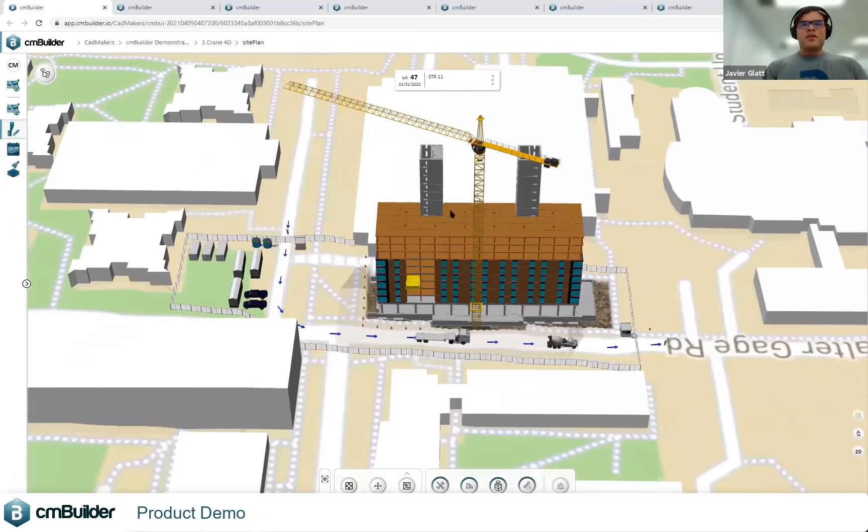And with that, I will lead into our little demo here of our product, cmBuilder. Pedro is going to share his screen, and we'll work through here, because a lot of what we're trying to solve with this project is exactly this. There's this idea of removing the barriers, getting people to be able to access using web-based technologies, digital technologies, mobile technologies. And we'll get started. So I have Pedro, who's on the other side of the table, physically distant from me, helping me. So I'm going to talk and he's going to click. And I will ask for some of Brent's assistance here. This project looks a little familiar to you. Hey, Brent. Absolutely, yeah. Great.

So what is cmBuilder.io? The idea is it's a fully web-based, 100% web-based. So there's no app. It just runs in the browser. It's a 5D, so 3D being the model and geometry, 4D being the schedule, 5D being the cost, site logistics, planning, and simulation product. So the idea is to actually use data and intelligence, not say digital paper or 2D with Excel, to just easily lay out your construction site, simulate how you're going to build it, find risks, optimize, and then share easily with your stakeholders. Now, our goal of this product is to democratize digital construction.

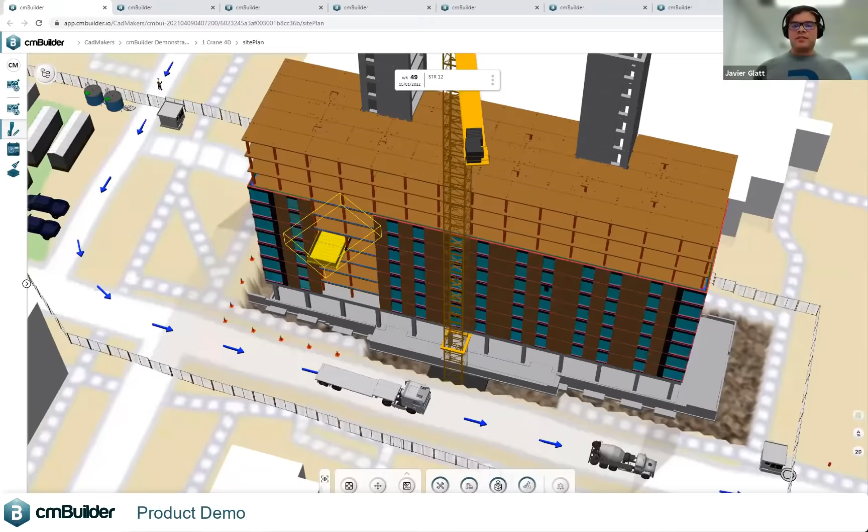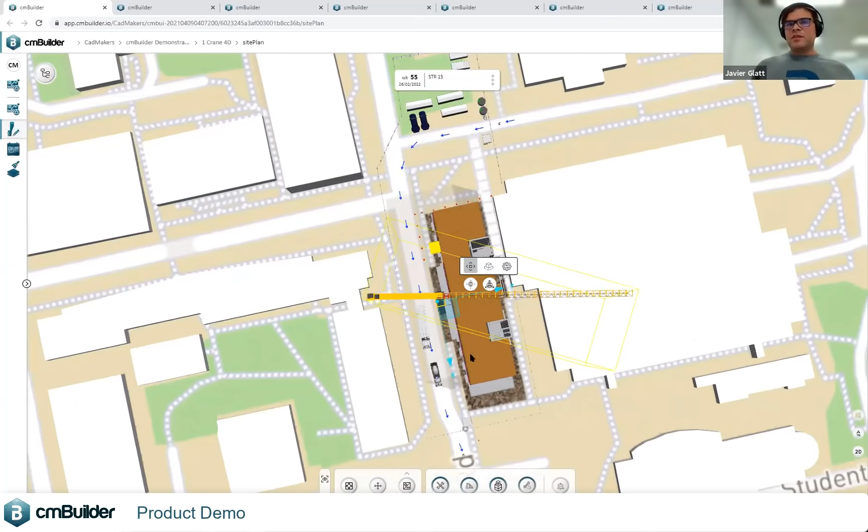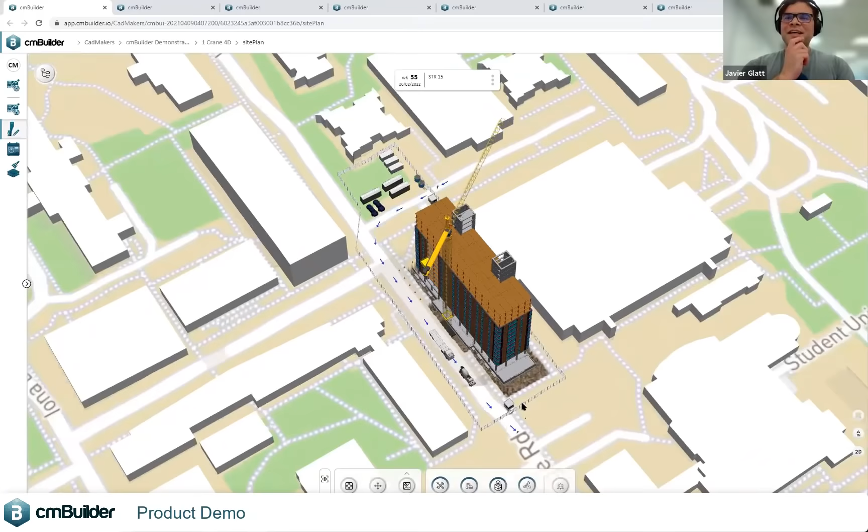We want to bring a high value, low effort, low cost solution to the marketplace that allows rapid simulation, different scenarios, what's 2 crane versus 3 crane. Yet all the resources coming out of cmBuilder are fully parametric if it makes sense to be. So we'll show you the cranes are fully parametric, the hoist, etc. We'll show you in a live demo. Now, some things don't need to necessarily be parametric depending on the resource, like cones. It is still laid out parametrically based on rules, but the parametric aspect, it depends. So why are we building this?

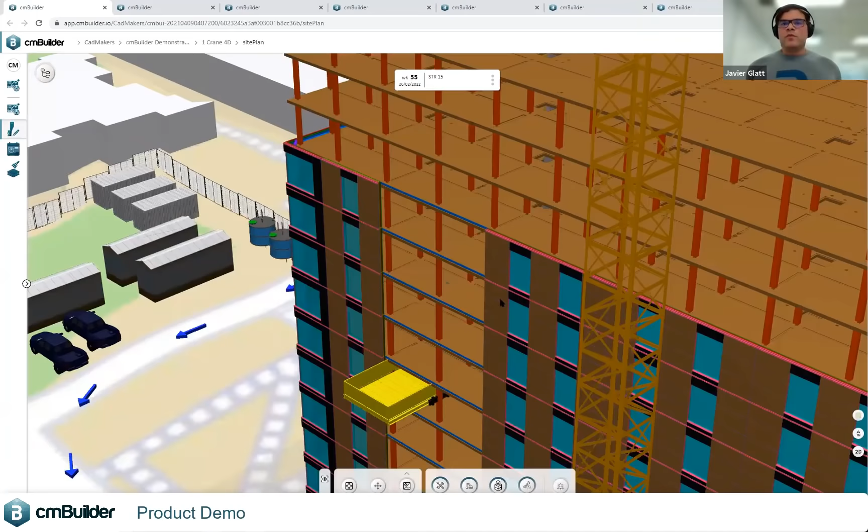And last thing, open BIM. So the idea is, we built our own converters from IFC 2x3, IFC4, STEP, and FBX. Work in Revit, SketchUp, Tekla, CATIA, it doesn't matter. The idea is that you upload the model in here, and if you don't have a model, you can also create massing inside the product directly in the browser. It's very easy to do. We'll show you that. Why do we build this?

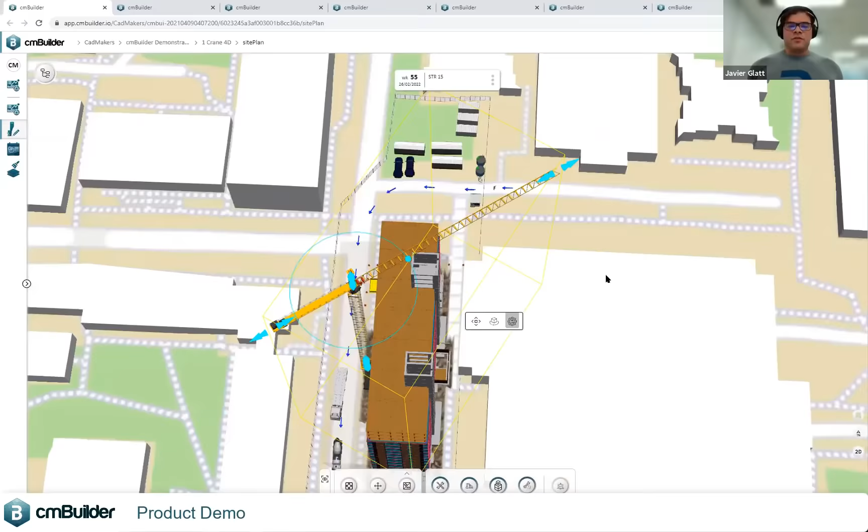So a lot of the themes we talked about today, right? This is just us providing solutions into the market, listening to people tell us their problems. And pretty much 95% of the addressable market we deal with do their site logistics plans using what I would call a digital paper workflow, right? Basically a 2D PDF editor with some Excel. And this is the analog kind of process we're talking about. Once you flatten that and email it, it's gone, right? There's no data, there's no intelligence. It's really hard to learn. It's really hard to scale from job to job. Richard mentioned how you're making similar mistakes over and over again. It's really hard to have that in a database.

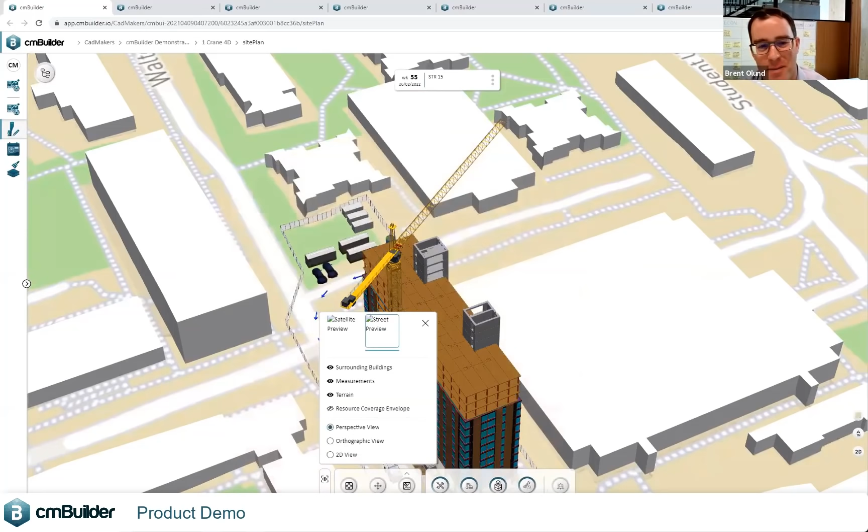Javier, I just want you to stop the screen there where it says week 55 on the top of the drawing, and just to point out that the way we used to do this was literally tabloid size flip charts of paper, and you had to actually draw the stuff on there.

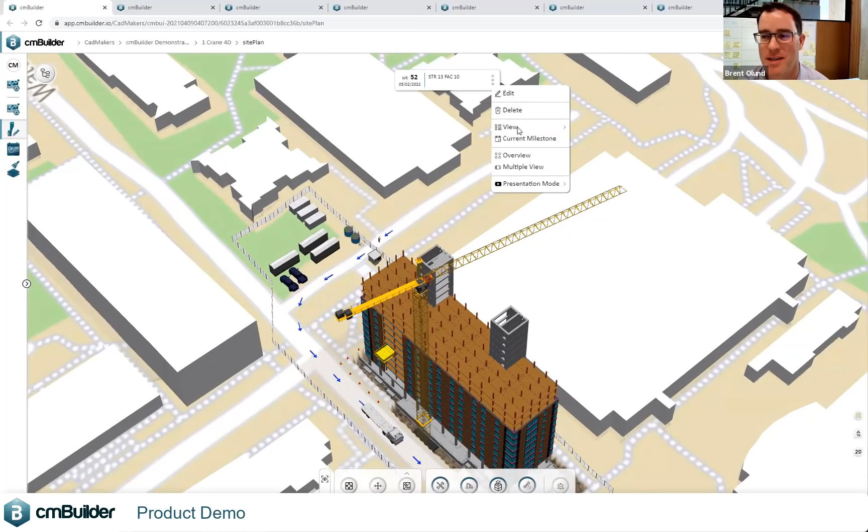And heaven forbid you didn't draw things right on one of them, you had to start over. And we did jobs that were 10 to 24 months, where each month end was a flip chart of how the logistics were going to be. Now, mostly multi-building sites, but this one here, one building, it certainly still helps to have the time scale shown as to what's happening and really can walk people through how the site's set up a certain way.

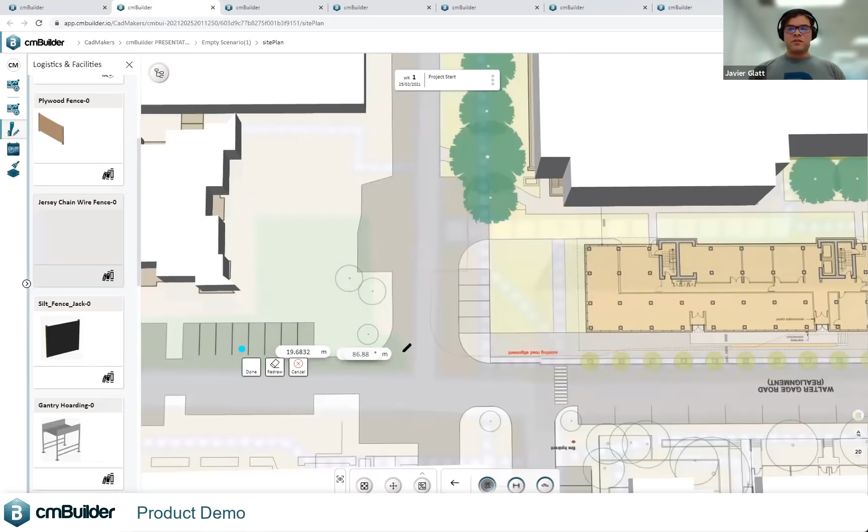Yeah, for sure. So basically, at the bottom of the market it's kind of like 2D PDF editors, Excel. Top end of the market, you have maybe higher value solutions, but they're sophisticated. They require locally installed software. You need to be trained, expensive machines. So it leads to a lack of scaling in terms of industry. So by us starting from scratch, literally from scratch, and building it with customers on the front lines, the idea is to truly transform the digital workflow of pre-construction planning and superintendents moving forward.

So what we're going to do is we're going to start live here. So this is a construction site. We've snapped in a drawing. We've overlaid that onto our site. When you start in cmBuilder, you put the address in. It creates a map tile. You can choose with topography or without topography. This is a flattened view. And then you have a whole suite of tools to start planning your construction site.

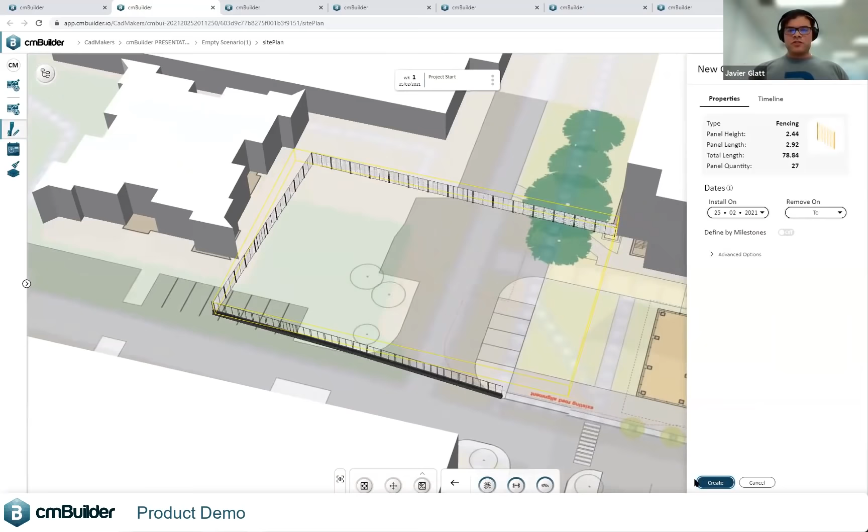So what Pedro is doing right now is he's saying, okay, let's use Jersey barriers on the roadside, and then just a traditional chain link fence. As you can see, every time you place a resource, this is parametric modeling happening directly in the web. So you're just clicking directly in your browser and generating new geometry, new information, and laying out your construction site. I'm sure, Brent, it's stretchable. That's the way I like to describe parametric. It means you can stretch it, but you can also add rules to it that say, if you stretch it beyond a certain amount, it adds another post inside of it or things like that. Correct, exactly. It's rule-based.

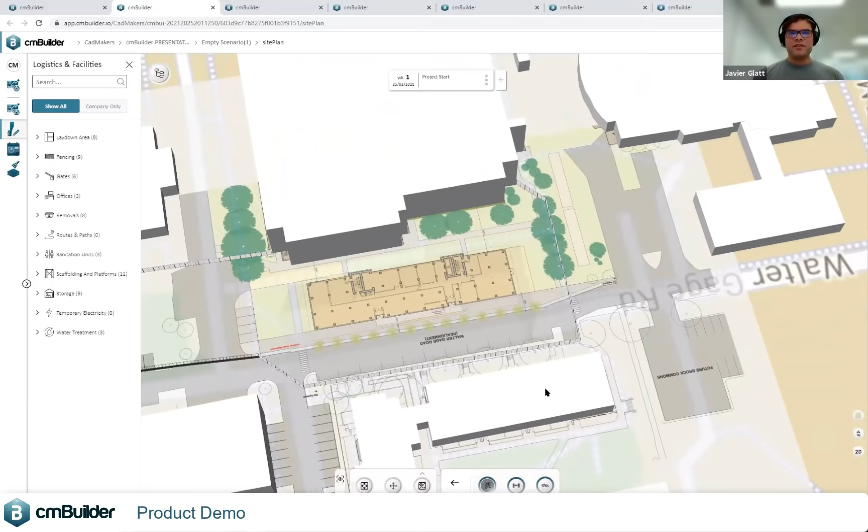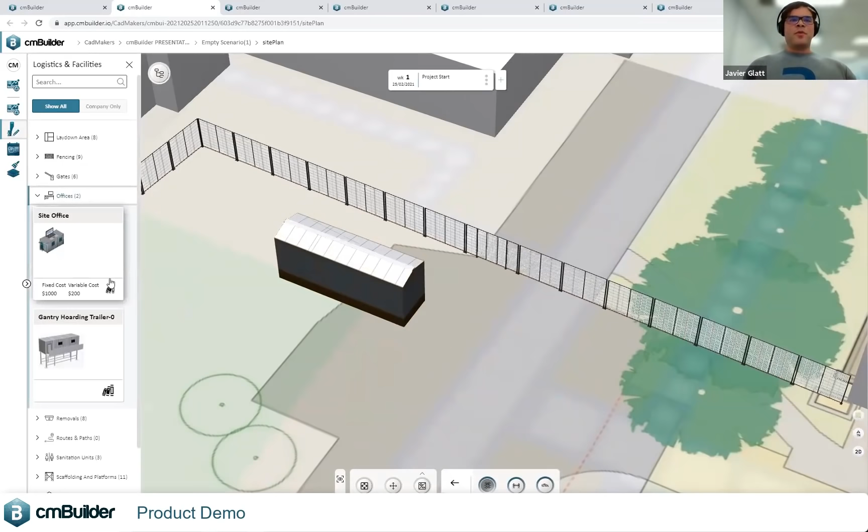So now we're starting to do fencing. Now let's start doing accommodations. So again, we haven't done anything with a model yet. We just have a drawing that every job has. Often in early stage logistics, you might only have a drawing. Snap that in, and you go into a catalog of parametric resources. Let's lay out our trailers here. So if you have a parametric trailer, you can start planning, okay, if I'm going to have over 50 people on site at any given time, we need to have 4 porta potties. We have to have the appropriate amount of accommodation area for your trades, your sub trades, and laying it all out.

I know the actual project, Brent, you didn't have that much space, so good job, Pedro, by cooking the books. Eventually, cooking the books.

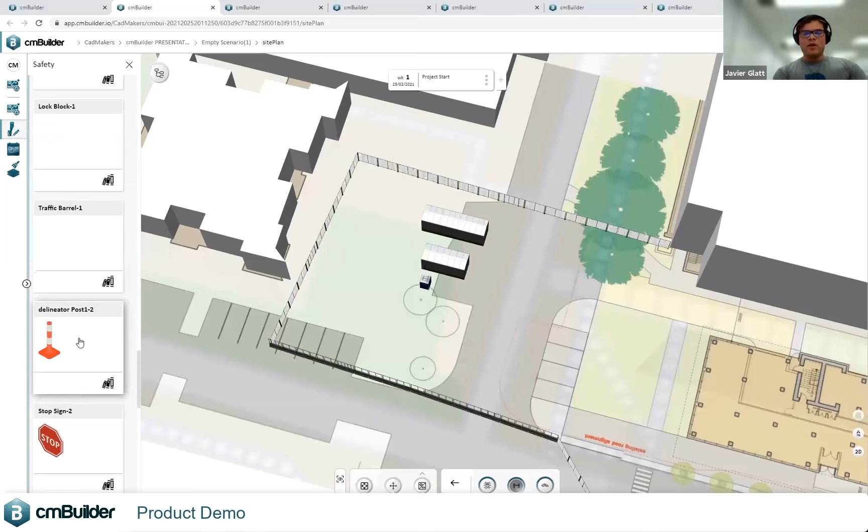Yeah. So we're not going to do every single thing here, but you get the idea. Let's go to traffic control. Huge on just about every site, especially those downtown sites where you have really tight sites, postage stamp sites. So let's start thinking about logistics around traffic. So cones, are you going to have to shut down one lane of the road during construction time? Do you need flaggers? How many flaggers are there?

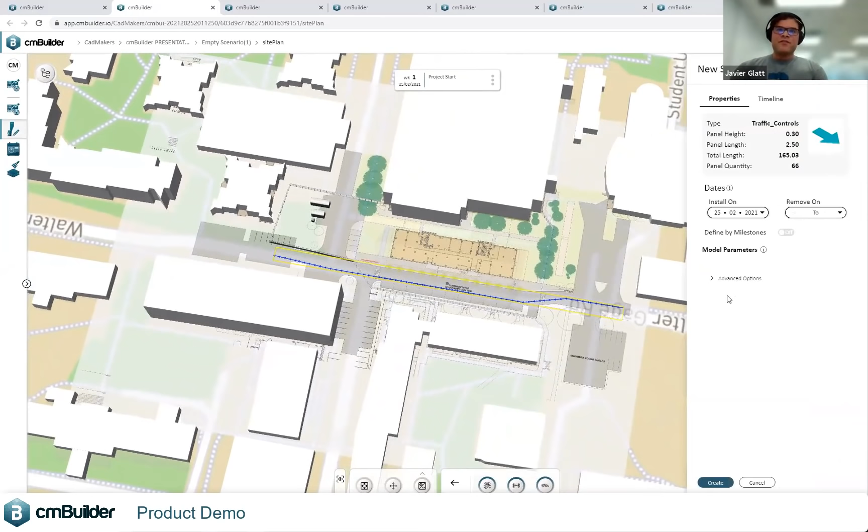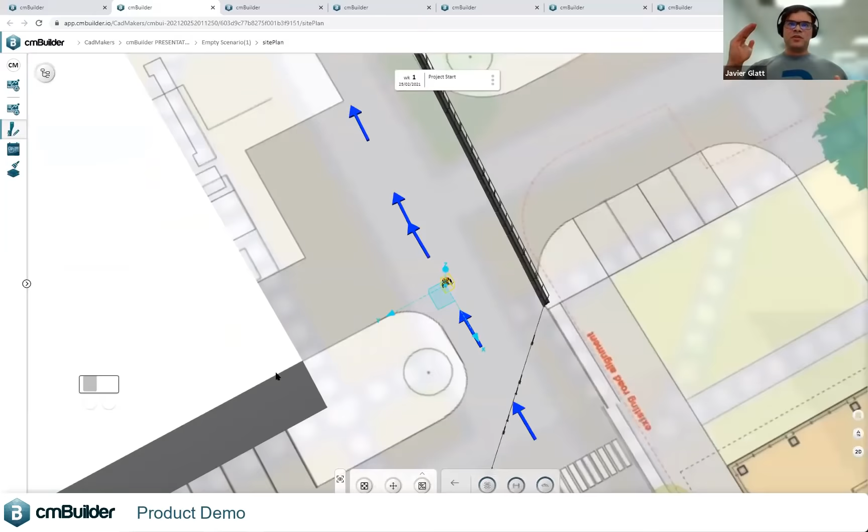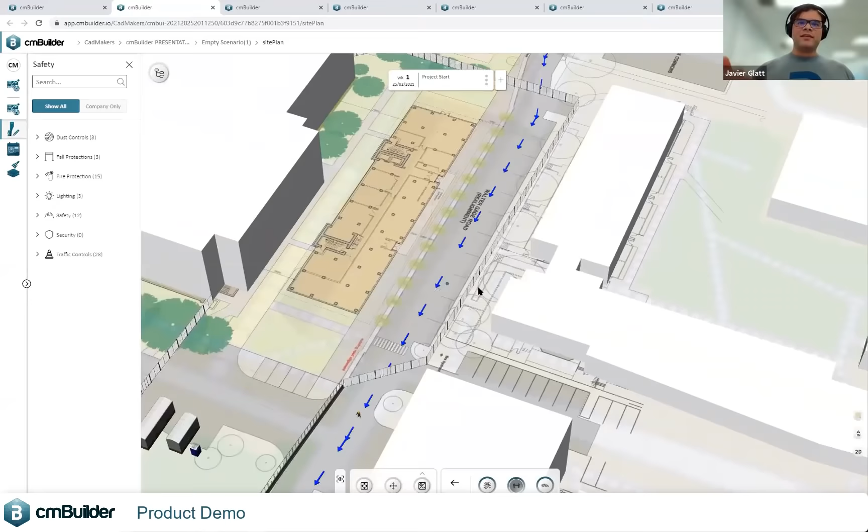And one thing we didn't do that I was supposed to do, which we'll show you in a second, is every single thing that you're placing here into the scene is automatically syncing. We won't show it now, Pedro, let's just keep going, but it's placing into a master format cost histogram of your general conditions. So this is only the GCs required for operating the construction site. So if you have an 18-month build and you need a crane from month 3 to month 17, you're capturing all the costs automatically as you're adding things to the scene. So if that flagger has an X dollars per hour rate, all that data flows into your site and logistics.

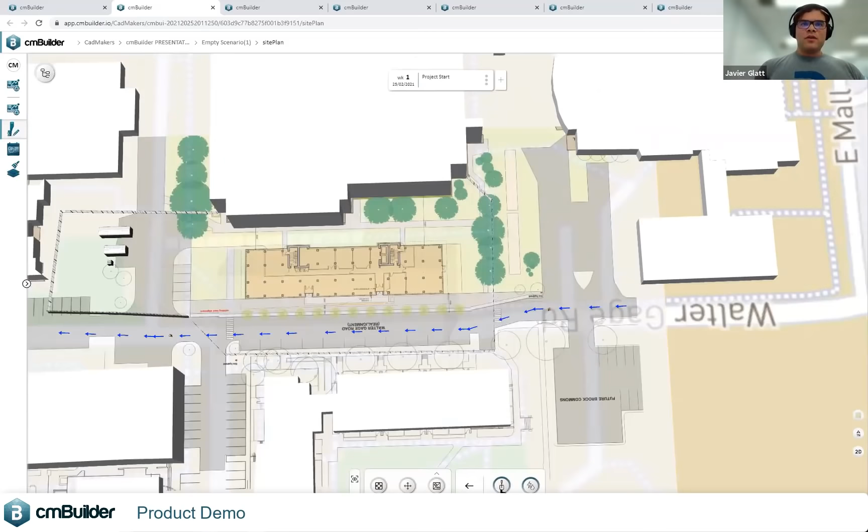Okay, so now we've started thinking about, you get the idea. There's a whole swath of site logistics planning out of the box. Let's start thinking about excavation, Pedro. So let's get on top of the model. You can go in 2D or 3D mode and start planning the excavation. For now, we have kind of this drawing here that helps guide you. If you have grid lines you want to reference inside cmBuilder, it makes it a little easier. But Brent, I'll ask you the question. You remember this job?

I know we spent quite a bit of time in the ground coordinating. How deep roughly was this excavation? It was a pretty shallow one, was it a few meters only, right? There wasn't really a basement, but we had some deep core footings, deep tower crane base, and underground water storage tank. We had to coordinate those things with all of the underslab plumbing.

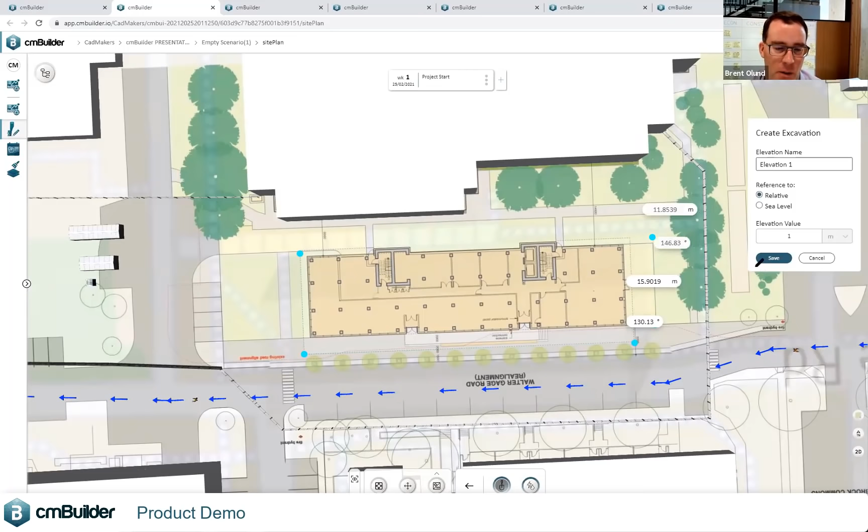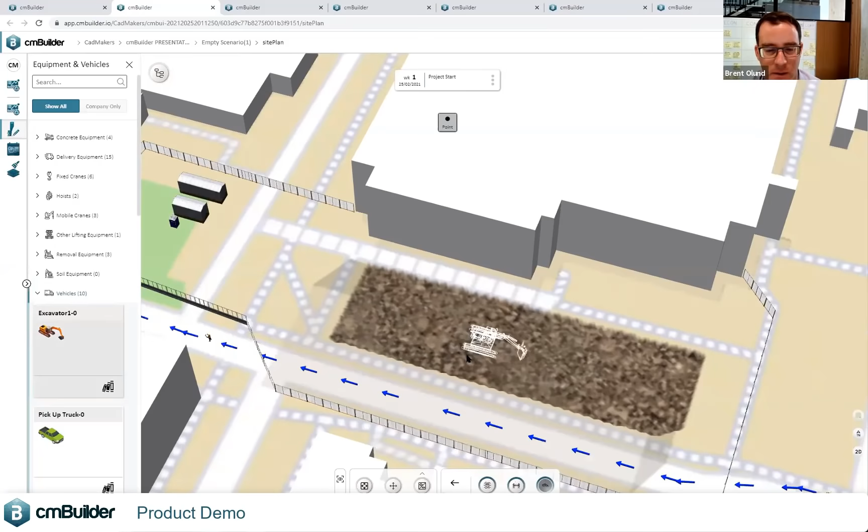And one of the things I liked about working with you guys and the model was we could kind of imagine that we're in the ground looking up at the underside of the model as it pertained to all the footings and the coordination, and ask some of the right questions then about how to solve some of the problems with getting the plumbing from point A to B through all the footings without losing slope to drain. There you go. Okay, fantastic. So this is a very shallow excavation.

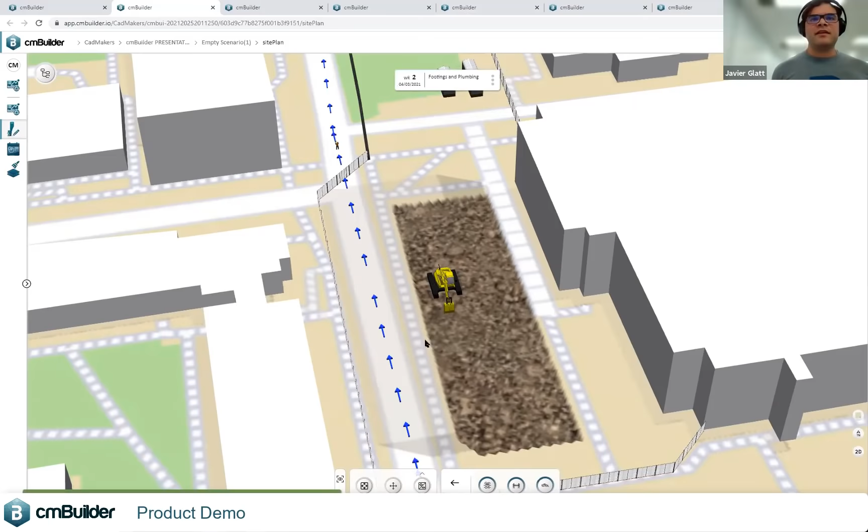What Pedro's going to start doing now is visualizing the construction site during this milestone. So at the top here, as he's going, he's basically creating his 4D schedule and his milestone, saying, okay, I need to start excavating on this date. We're starting from the east side to the west, or however you want to do it. Now, we'll talk about at the end. We have a whole huge system coming for excavation planning.

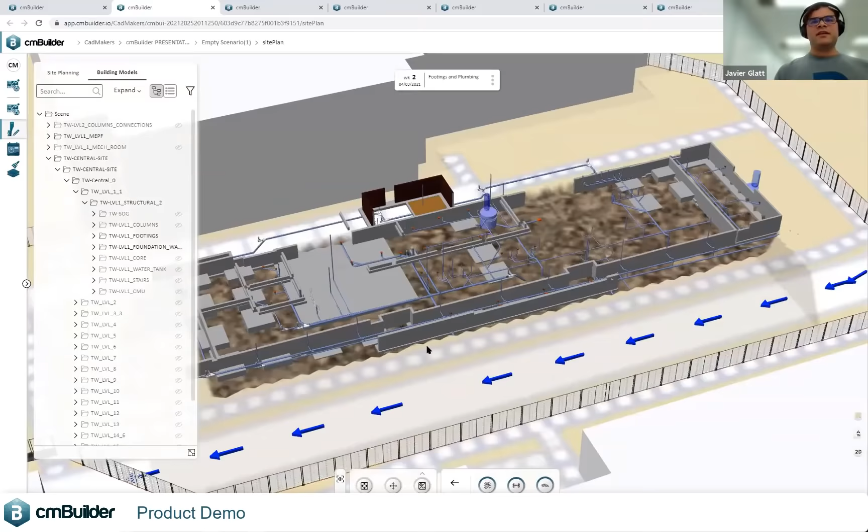But the idea is you can start visualizing access, especially if you're doing phased excavation or detailed excavation versus bulk excavation, et cetera. So you can select that excavator, what dates are they going to be on site, and then store that as a milestone. So when you send this, which we'll show you after, you're actually just going to be able to send a link and you can visualize that.

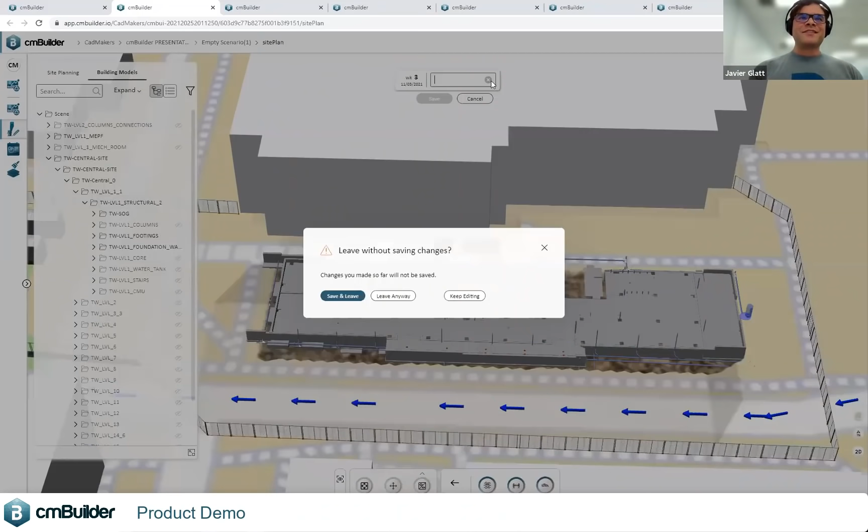Now, one thing that's nice here, we've brought in the model. In this case, there's a BIM model created. You don't always have that, but you can start planning your sumps, footing elevations, slab on grade, this type of stuff. Now we'll get to the next topic here, which is placing the crane. It's a big discussion. Just about every job, placing the crane is something that keeps people up at night. So now that we have the footings and foundation kind of visualized on the site, let's go ahead and show you 2 ways to model your crane on a construction site.

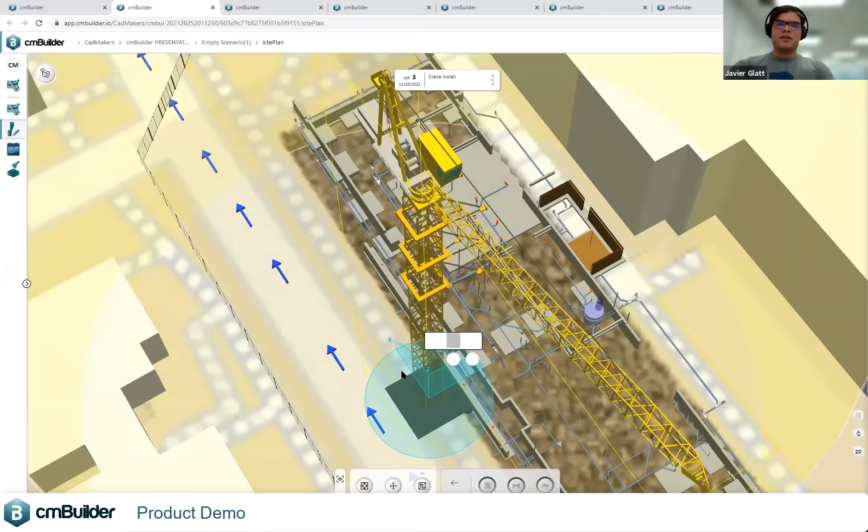The first one is just going to be going into equipment and vehicles, into your fixed cranes. We're going to grab something similar to what actually happened in real life, which is a tower crane located roughly there. So you just click and click. There you go. You got your tower crane. You can adjust all the parameters directly in the browser. You did a luffing crane in this case. And then you can start to kind of like move the site.

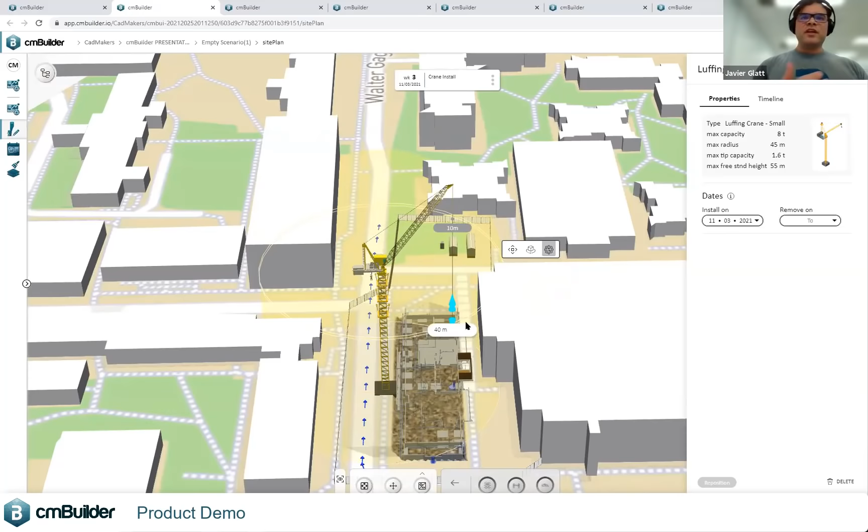So this is a top-down approach where you actually have a smart parametric crane that you can start to toggle the different parameters. Say, okay, this is the best possible crane. Make sure you can make all the reaches for your laydown area, boneyard, all that kind of stuff. And then place that and visualize if it's not going to clash with footings, any issues with like sumps or below grade plumbing when you're placing your crane pad, for example.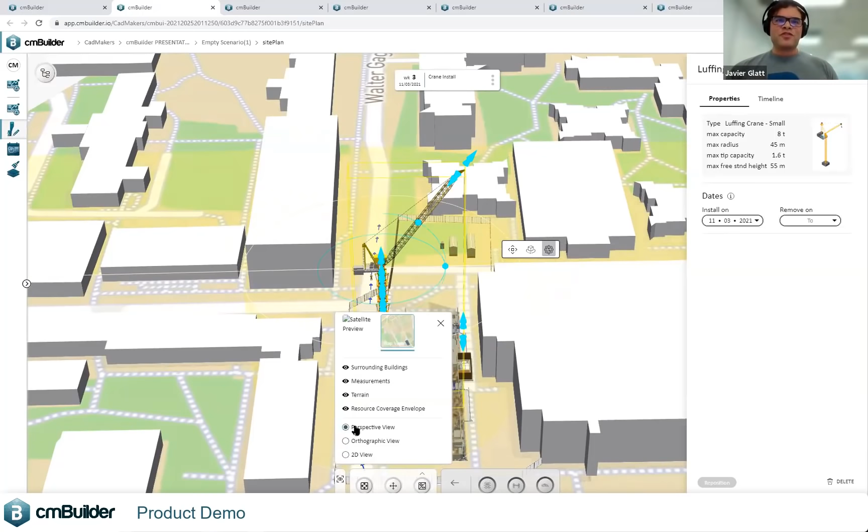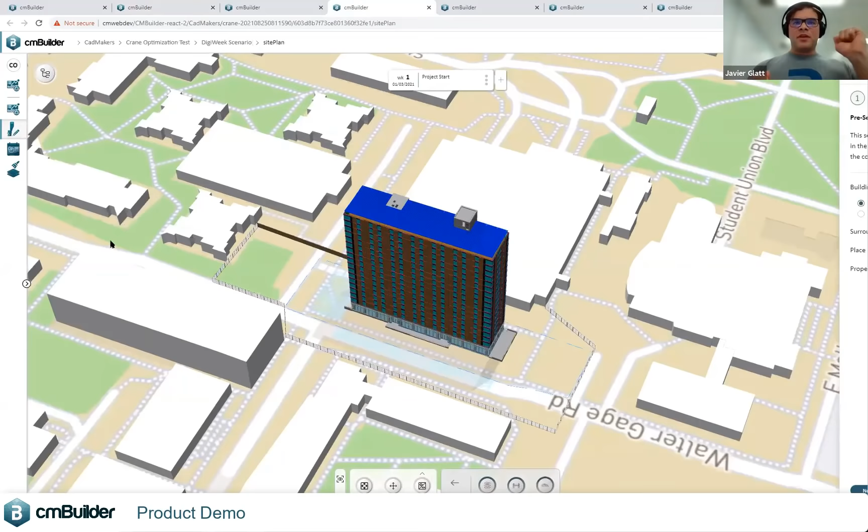Right now, since we've done this job, Brent, we've tried to replicate Brent in an AI. So what I want to show you now, which is a brand new feature we just launched, is our AI-based crane location optimizer. So option 1 is you can just model it. So as a user, you start modeling on the site. Now what's coming, it's being pushed hopefully by the end of the week, if not early next week, is this process workflow where you start saying, okay, what are the critical lifts?

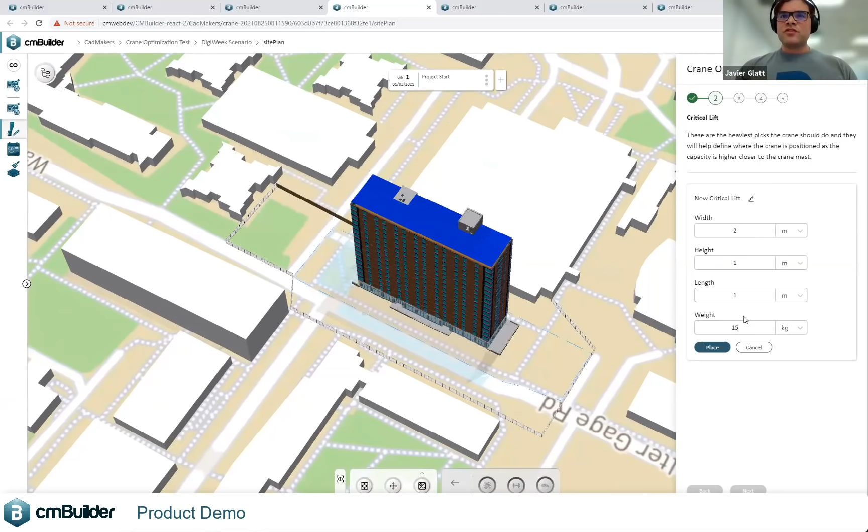So let's say you have an air handling unit that's 2 meters wide and a certain weight, 1,500 kilograms. Instantly, you just click on the building. So I got an air handling unit on the roof. It has to be located there, inside the steel in this case. Next step, you just start selecting your available cranes. No, I would do 2. Go back. So click those 2 that have data, that one and that one. There you go. So now you have a couple options of cranes.

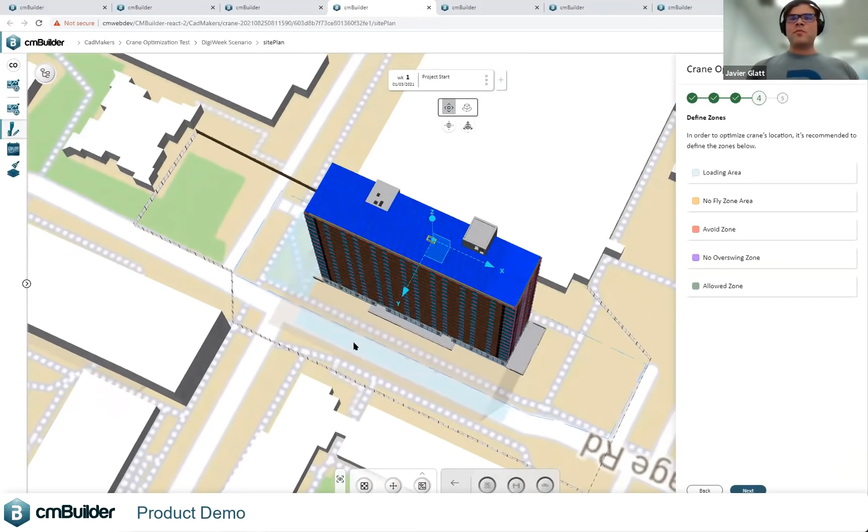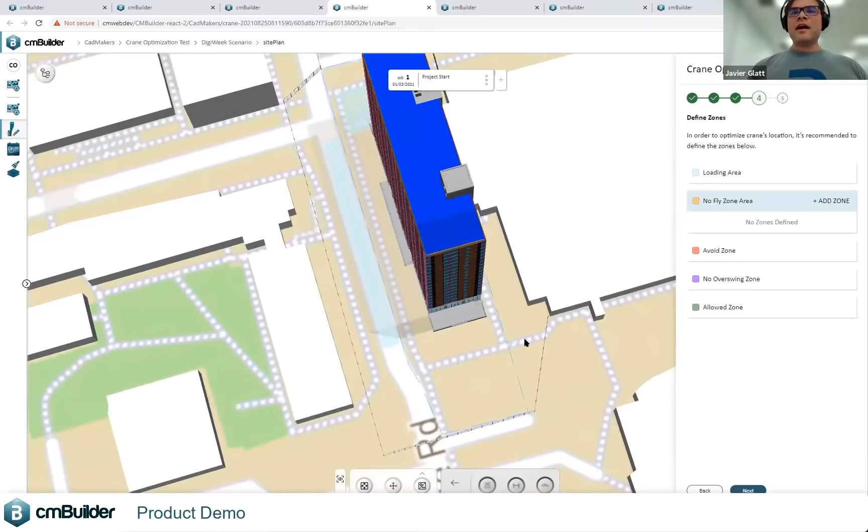Next thing you want to do is define your loading area. So you have to put your loading area and figure out what it is. We've already done it in this case where materials are coming to site. Now, really important, stay here, Pedro, go back. No fly zone. So I think it came up in one of the talks where you don't have permission to swing over the adjacent property, you can start to define that inside the algorithm, avoid zones and stuff like that.

And then you can kind of define this before you run the optimization. Next, you're going to click into the minimum distance to the building and how many cranes you're allowing in this scenario. Now, this is a pretty easy one, but let's run it. So this is happening live. Depending on how big the algorithm is, it might take anywhere from 10 seconds to 5 minutes, depending how complex it is.

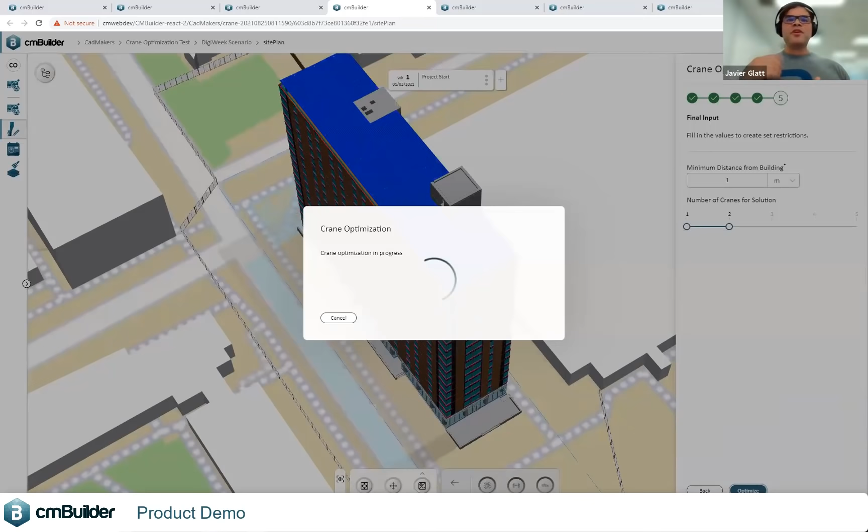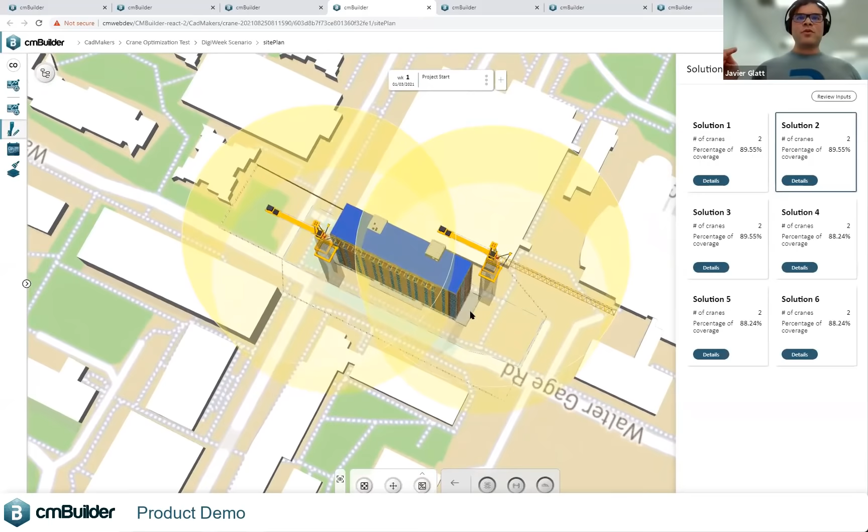So what's happening right now is this genetic algorithm is going through all the selections the users defined, and it's actually going to create for you a bunch of different solutions. So this solution was interesting for you, Brent, right? You mentioned that if you were to do it again, you might add a second crane potentially to increase the cycle times and put them on the corners. So we went fast enough, but yeah, it was very fun. We're going to come back to that.

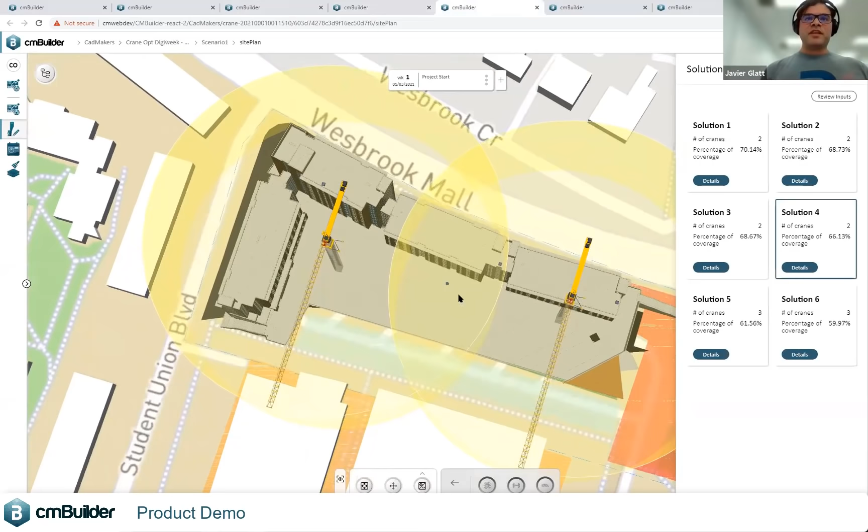But the really nice thing here is that you can just click through and say, okay, here's the suggestions coming from the tool, and then as a user you define. Now this is a pretty simple one. Let's go to a more complex one, Pedro, we've already run. So this is a project that could have 3, 4, even potentially 5 cranes. Has lots of multiple picks. Has lots of issues with where you're going to have your laydown area, et cetera.

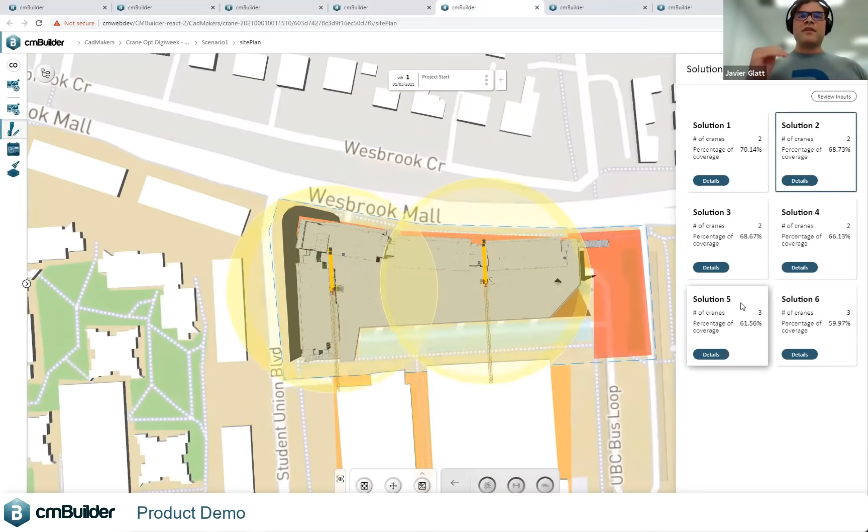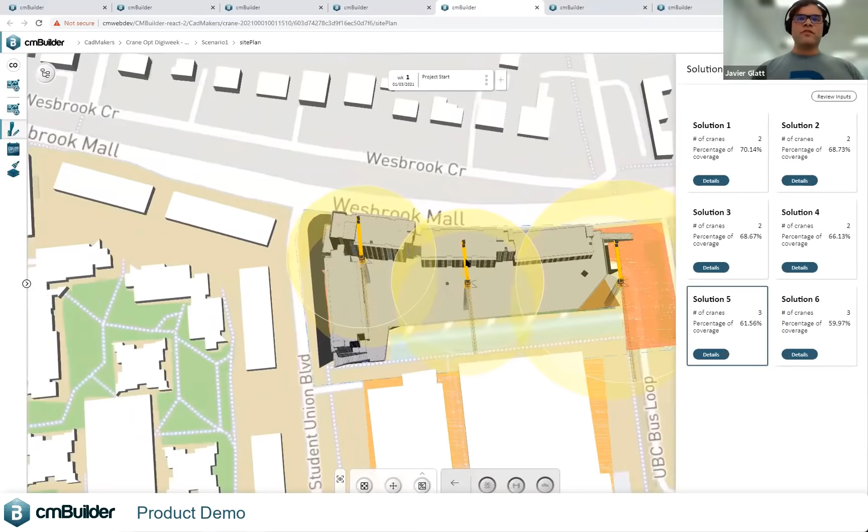And we've run this in advance, but this is where it starts getting extremely valuable, right? What's it look like at 3 cranes, 4 cranes, 5 cranes? What does it do in cycle time? What does it do to the schedule? Yes, you're paying more per crane, but you're reducing your schedule, which is obviously paying back for the owner faster, and so on and so forth. So we're really excited about this feature and providing more options for users to select the most important resource on most construction sites, the crane.

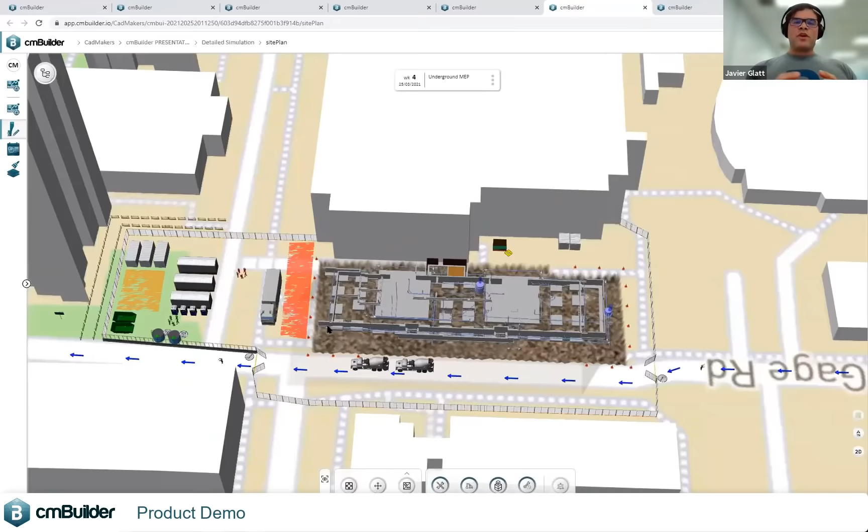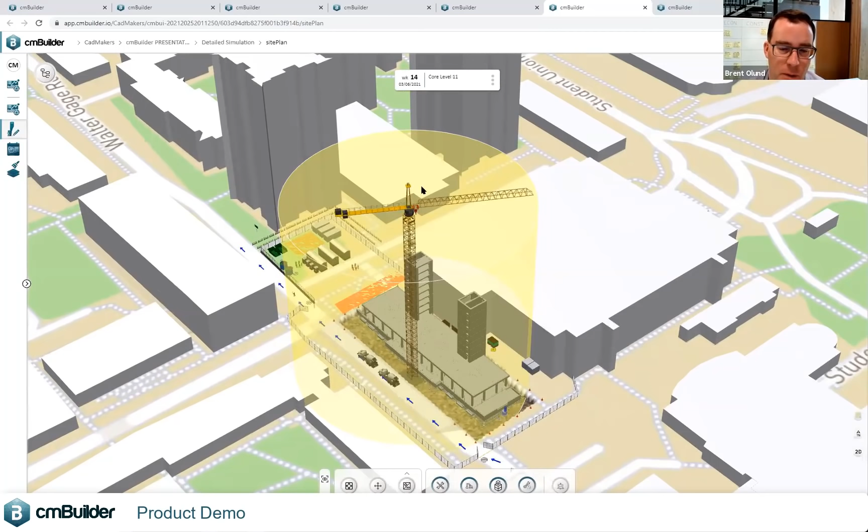Let's go back into the 4D scenario here. So now we're going to go to Brent and talk pretty much about Brock Commons. The goal was to build the concrete and the cores in the winter months, from what I understand. Roughly, what was it, about 4 months? Sorry, from bottom of the ground. 4 months, yeah, around 2 months in the ground up to the podium, and another just over 2 months to build the cores. Right. So we've started to simulate that. That was with a 2 stories at a time jumping form system that we had to come up with. Normally, the cores would have gone more slowly than that by about a month.

Great. So what we've done here is inside cmBuilder, you bring in your model and you just split the model and say, okay, I want to do 2 floors a week on the concrete cores. And then we want to show maybe a detail. You can hide the envelope of the crane. It will probably help you visualize it a little easier. So you go into the tools, you hide the parametric envelope.

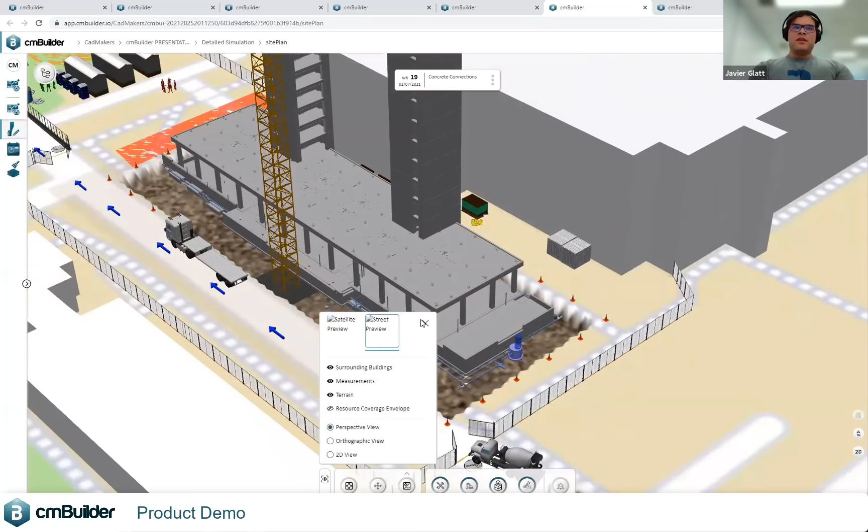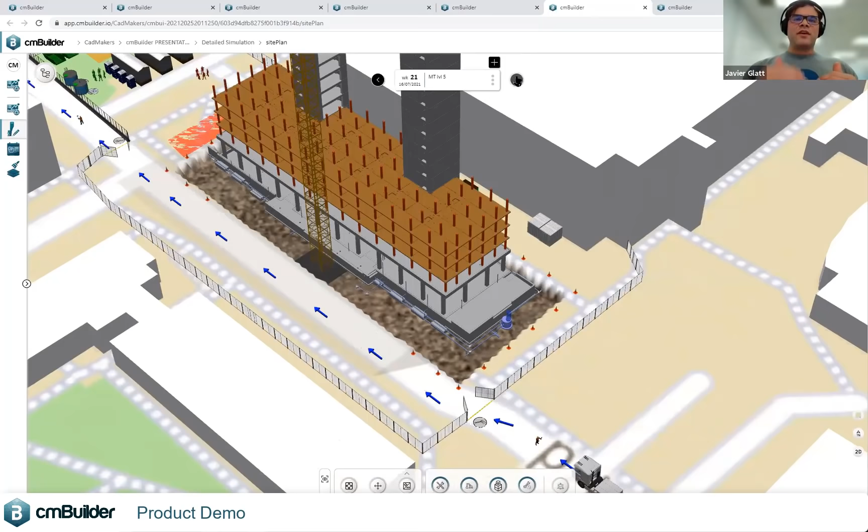So some of the biggest things on this project when you want to tell your story were the connections from concrete to wood, and wood to steel. Those are the important things. So you can start inside your 4D scenario, drilling down with markups or different ways to analyze, in this case, the connections for the columns and when the columns and the panels come together. So again, this has already been set up for us, where it's about 2 floors a week. Correct me if I'm wrong, Brent, was that your cycle time? Yep, 2 floors a week.

And then those outriggers that were bringing in the materials, leaving those unitized curtain wall or unitized facade panels out was a strategy, from what I understand as well, right? You wanted to bring weight into the building because the mass timber is generally quite light structurally. Was that the idea? Yeah, I mean, we were able to close up obviously the bottom half of the run there by the time we were using the top half, but yeah, we did it that way.

Okay, good. So now the really nice thing here is I'm actually going to share my screen from my phone. So the idea is normally you would do a PDF. Stop sharing, and I'm going to share my phone. Hopefully it'll let me here, share my screen.

Hopefully my mom doesn't text me. She was texting me earlier. She's going to tell me about how I never call her.

Okay, let's try this. Is it working? Oh boy, here we go. We've tried this a lot of times. Start broadcast. Okay, tell me if you guys can see it. You're good. Oh, I'm sharing my screen.

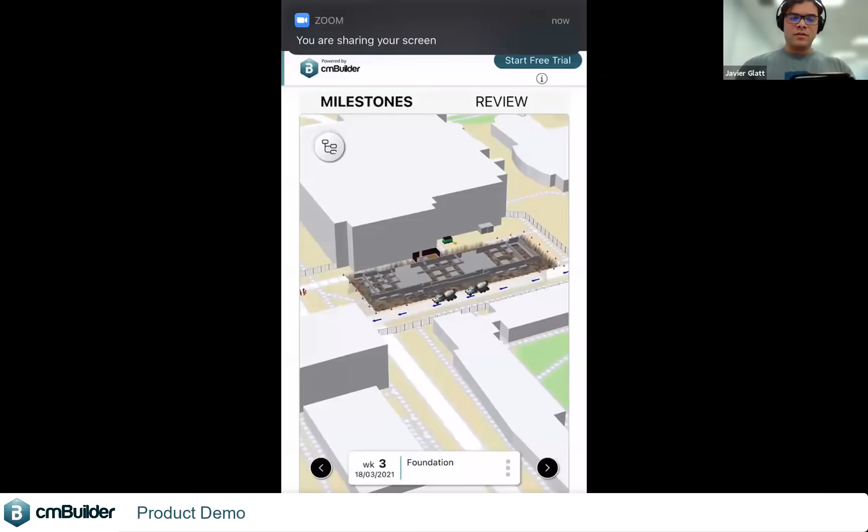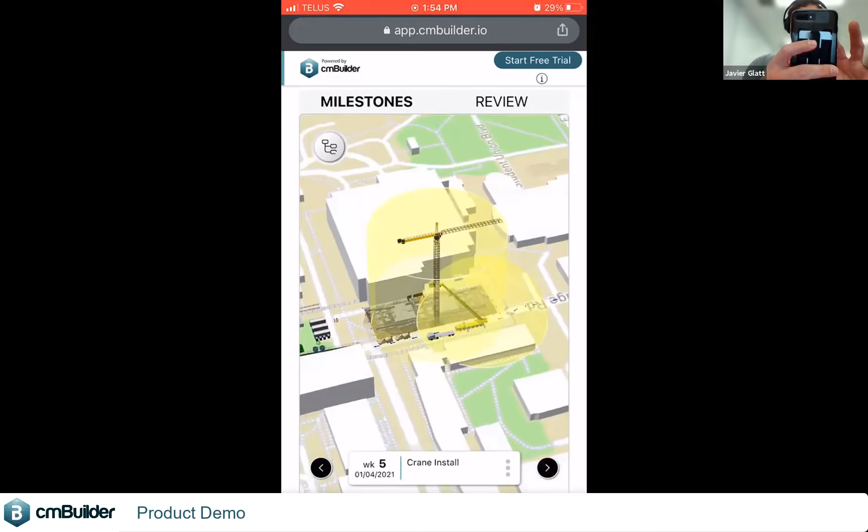Yep. So now I'm seeing, so in advance, Pedro has sent this. This technology is fully web-based and is optimized for mobile. So if I just want to click through that same scenario that Pedro just gave me and say, okay, I want to visualize my below grade plumbing, I can do that. I keep running through the simulation. Here I'm going to start, okay, when I have the crane come in, I'm going to visualize where I'm going to have my mobile crane help install the tower crane, and so on and so forth.

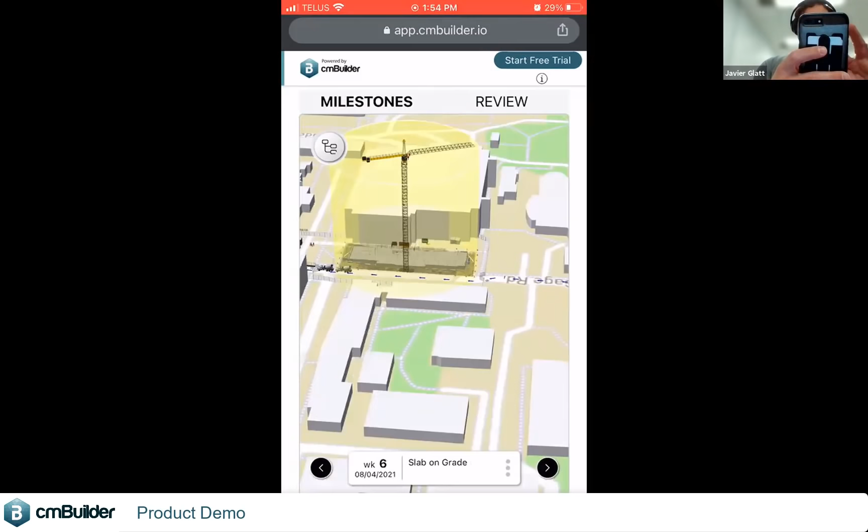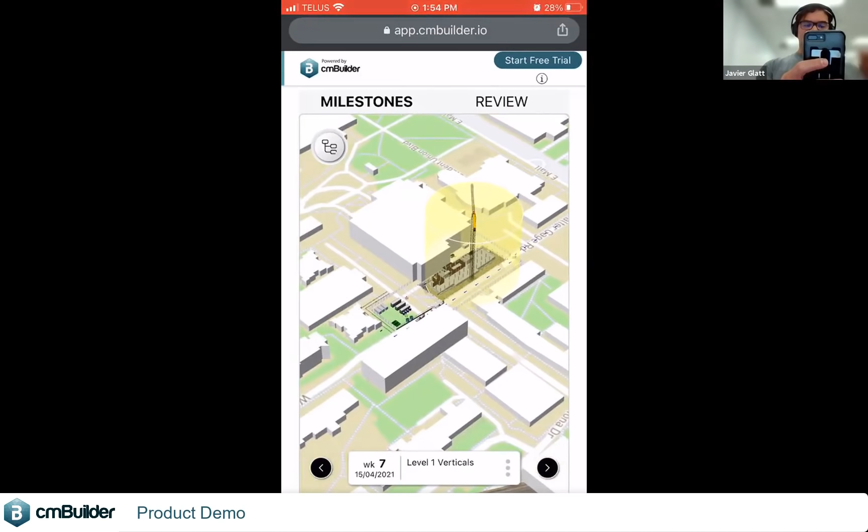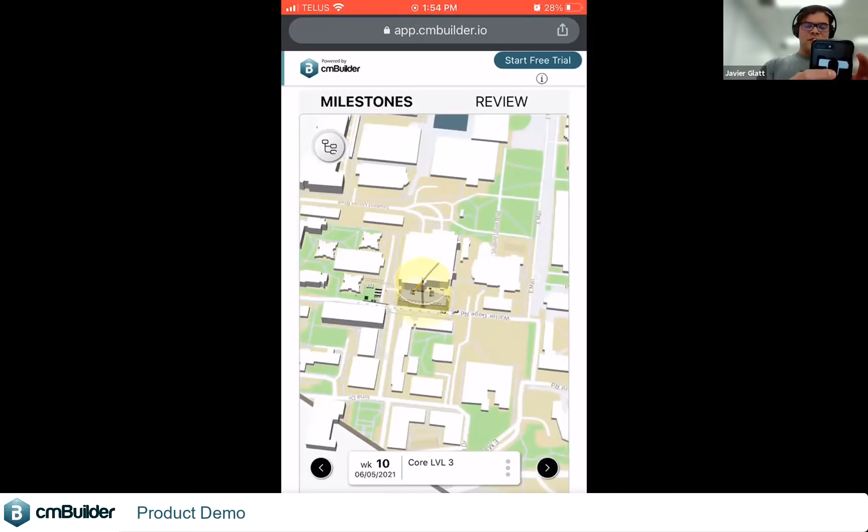And we'll actually drop an example in the chat after we're done here. But the idea is that you can do it yourself. You can run the simulation in presentation mode, which will allow your client, let's say you're sending to a city inspector, you just push a button, it's called play, and it plays the 4D simulation and explains your site logistics much better than what you would do in a PDF with hashed lines and radiuses of cranes all over the place. So it's a one-click share type scenario. Okay, I'm going to stop sharing.

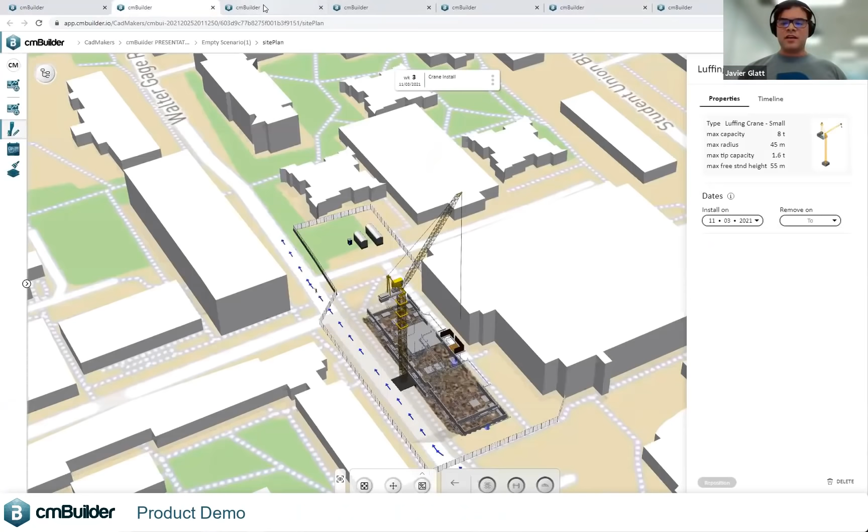Pedro's back. Good. Now, we only have 6 minutes left, so let's go to the 5D cost histogram. So you just saw we've placed all this stuff live inside the scene. What it's done is if you set up your database correctly, so you have your costs, your demob costs, your different types of incremental costs for different resources, it's automatically going to push here into the 5D element where you can go through, in this case, by MasterFormat, and get an idea of real-time costs.

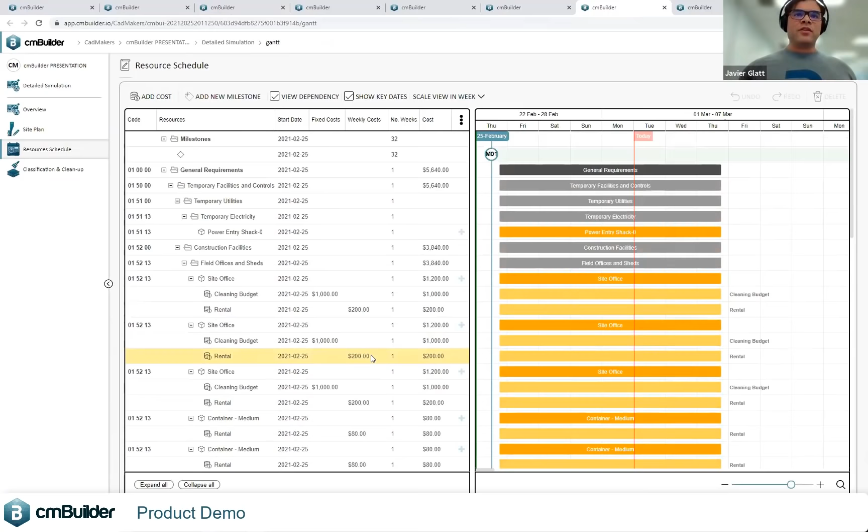I remember talking with Tyler a long time ago when they were planning jobs, and occasionally early stage users say, I need a trailer or two, and they're $500 a month. And how many months do I need it for? I'm not sure yet, right? You can start really saying, okay, I need 5 trailers for $500 a month for 18 months, right? And really add that up.

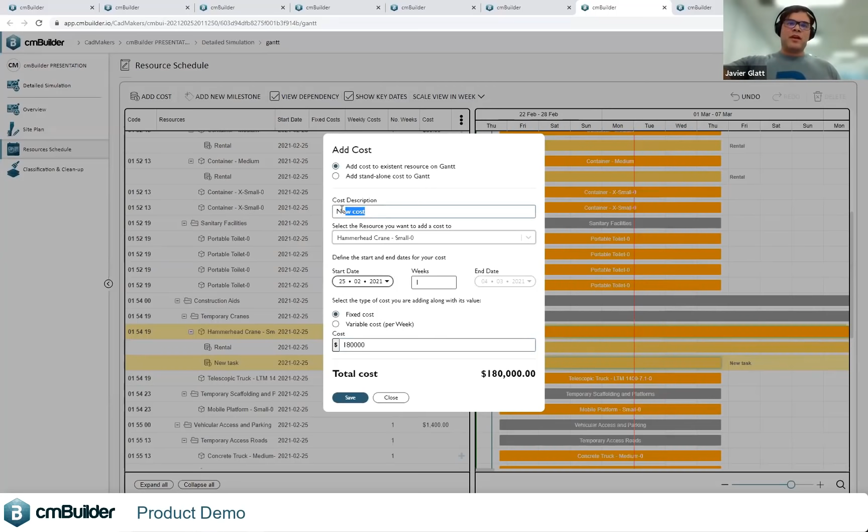And then every time you use that resource in any project, it goes in the database. So next time you're building an 18-story hybrid mass timber concrete building, all your actual costs, you're going to be able to use in the next pre-planning, right? So you're using the data that's coming from previous jobs to inform the next planning job, to understand and track these costs, okay? So let's get back into the massing.

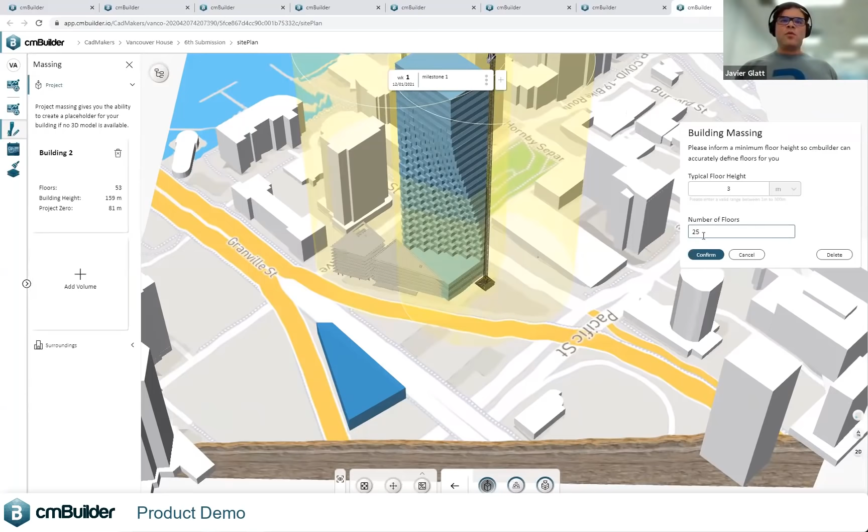Now, a lot of times you're going to say, what if I don't have a model? So we've built a basic, but still somewhat powerful massing tool. So directly inside the application, you can just snap in a drawing, get an elevation, say, okay, floor to floor heights are X, here's the geometry of the building. And you can actually model, in this case, Vancouver House, a pretty complicated project. And overall, it's pretty easy. You judge the floor heights. Really, for site logistics planning, you want to know where your boundary conditions are, where your access is going to be, where the crane tieback needs to be, these kind of things, so that you're able to do that directly in the product.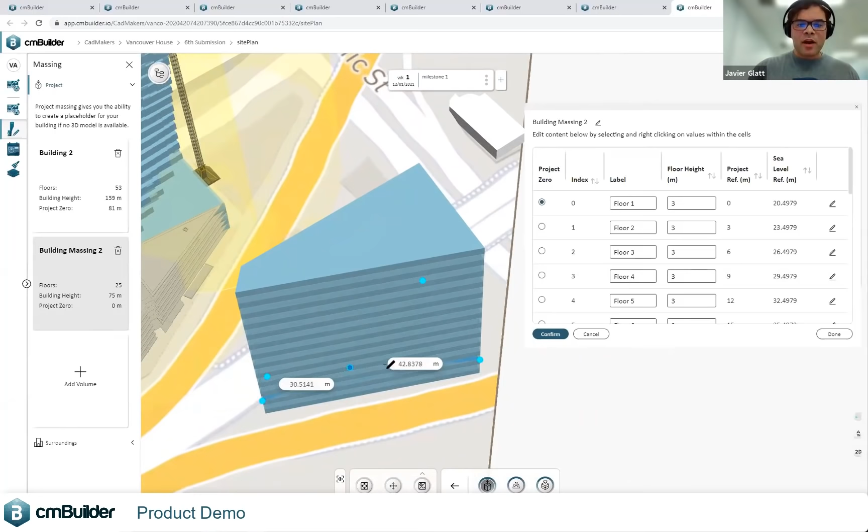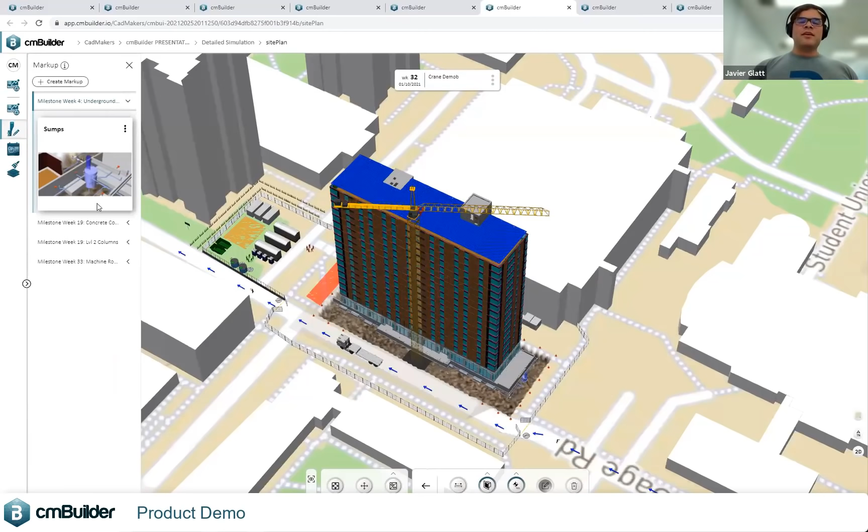Now we want to talk about markups. Let's go back into there. We just pushed markups, which tie to your 3D, your 4D schedule. So if you want to be able to say, hey, Brent, we're looking at your connections from the CLT panels to the core, which was a really critical thing. You can store a markup, and the camera is going to go down here. You have dimensions, you have sections, information.

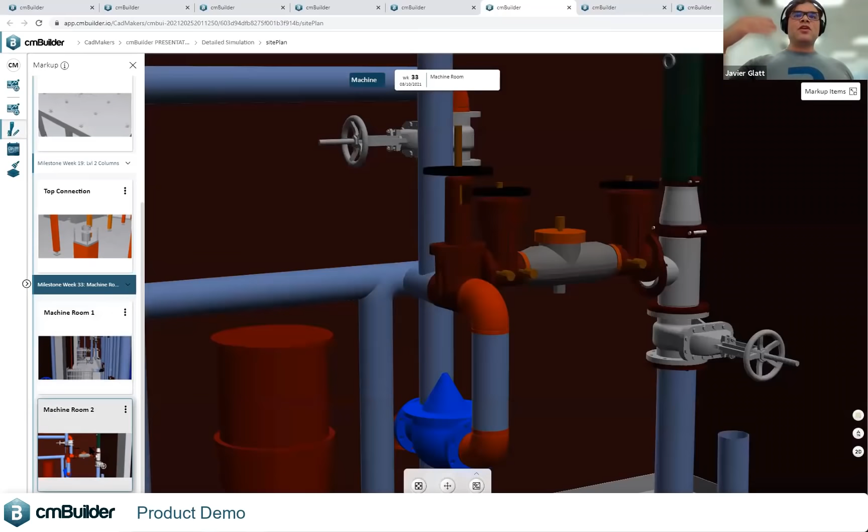You just click through. So this is another way to make it really easy to share this information just with a web link directly to any phone. Click, click, click, and in the actual presentation, the camera moves to show those areas. Really good for when you're talking about constructability, right? When you're saying, hey, am I actually going to be able to access and install this member that we thought we were going to? You just create a markup, and you can link it inside your schedule to say, at this point, I think it's a risk to do XYZ sequence.

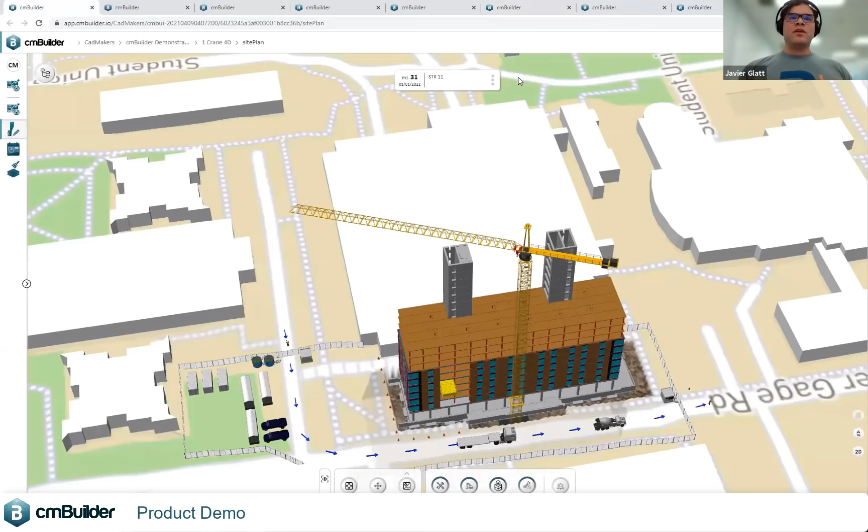Okay, so what we're going to do is Pedro's going to show you how, instead of sending a file, now you can do 3D and 2D. So let's go back to the main one. So you can do 3D and 2D. You can go 2D mode, 3D mode. We're going to be cleaning up, adding more features to the 2D for things like title blocks and being able to put your legends and everything.

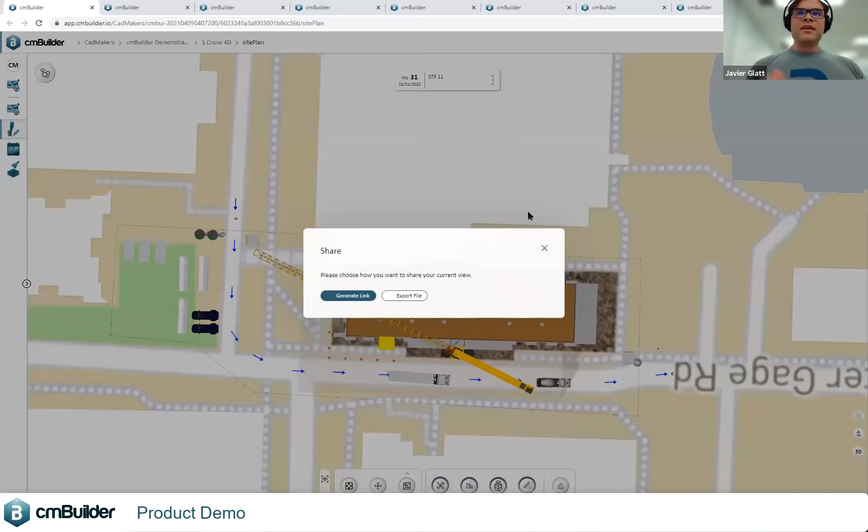That's really nice. Right now it works to export this as a PDF, but the nicer way to do it, in our opinion, is just share the link. So what Pedro's going to do, we'll have it expire tomorrow, and he's going to drop it in the chat here. So what day is it today? Yeah, so have it tomorrow, but with presentation mode, please. So you can select presentation mode and then, 1 second delay, it's going to generate a link.

We're going to drop this in the chat here to everyone. You're welcome to click this with your phone. Click this with your computer and run it. So now you're the persona of the client or the stakeholder, maybe the city inspector, your client that wants to validate your sequence. Now in the product, you can have multiple scenarios.

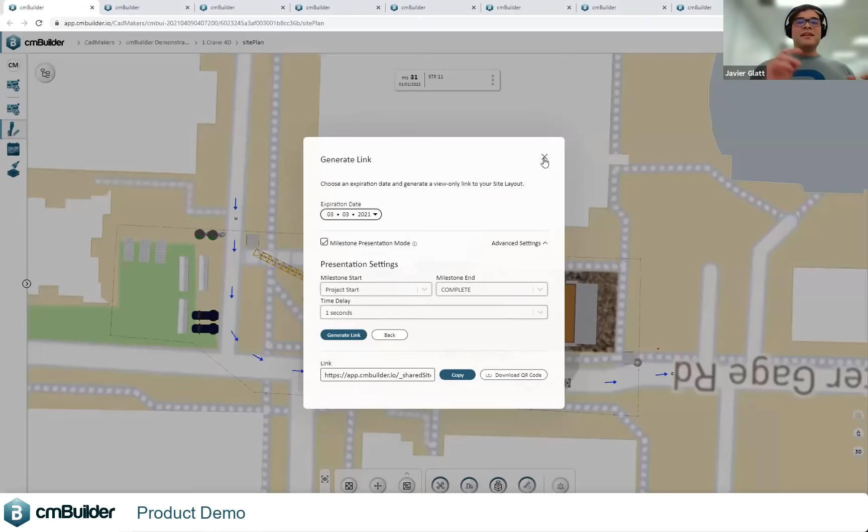So you could look at 1 crane versus 2 cranes. So 2 cranes has 2 hoists, double car hoists versus single car hoists. All those resources are directly in the product. And with 1 click, you can share. You don't need credentials, you access the link and you're in there.

So my last kind of call to action, I should probably say the next big features coming are, and we talked about this with Brent, excavation planning. So we're going to be able to model your excavation, do your bank volumes and detail excavation, figure out if you're going to do anchors versus shoring, etc. We're also going to have a whole bunch of other features coming around optimization soon as well. So we're really passionate about this. And again, the idea is to democratize this, make it easy for anyone to use, superintendents, project managers, not just the techies, and be able to replace more analog ways of doing this work.

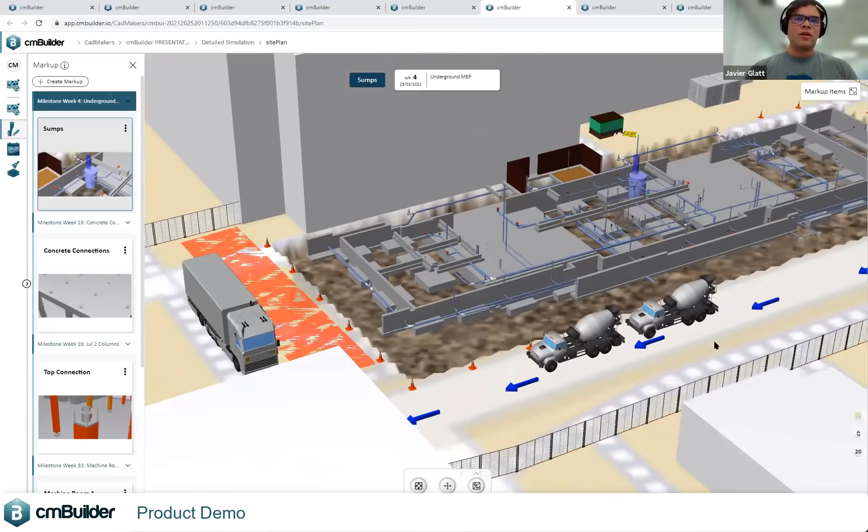I think we're literally on the minute. Did I miss anything?

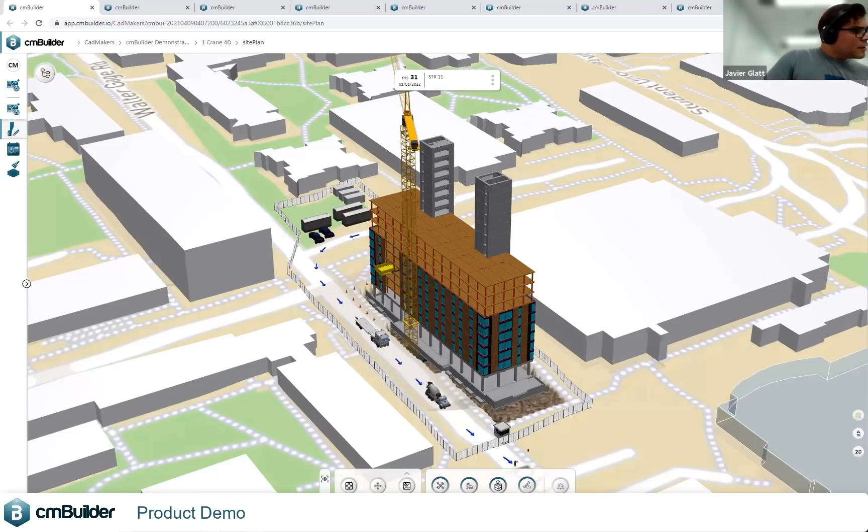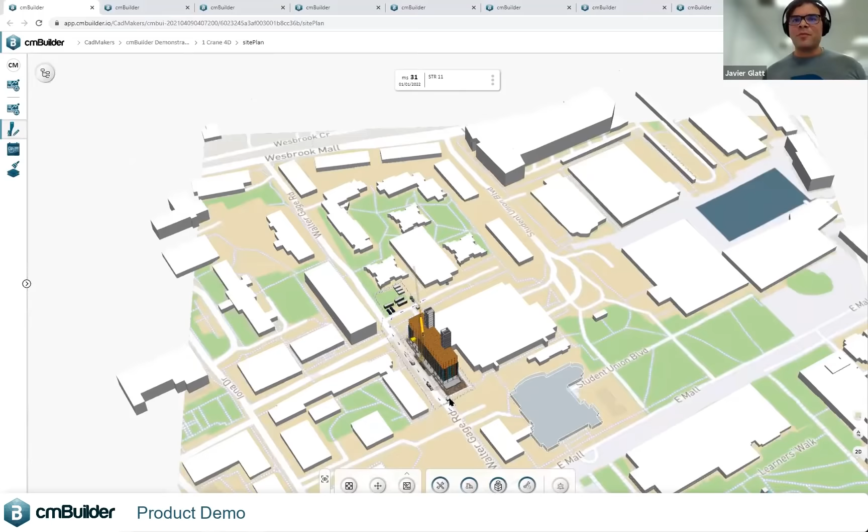Is the software prepared for linear civil works? It is. It depends how linear, and Tyler and his team tested us to the max. We had to get the devs involved and increase our map tile size. What did we get to, like how many kilometers? We're up to the large map tiles. So as long as it's not longer than 1.5 kilometers in size right now, anyways. And if you're larger than that, talk to us and we'll see what we can do. But yeah, if you want to do multi-phase, more horizontal work, the product works well for that as well. Of course, the features we're showing are more vertical in this case.

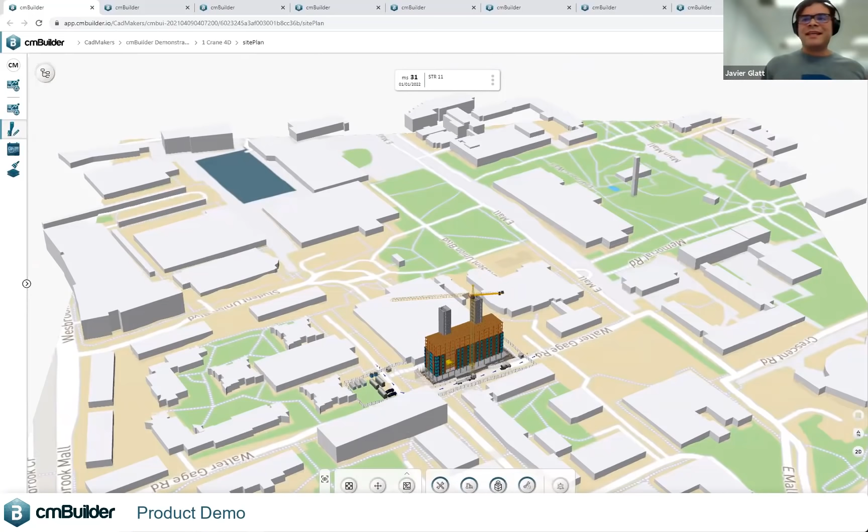There's another question about... Yeah, so I answered that. So the resources inside the product itself that come out of the box are parametric, and what you upload from, say, Revit or Tekla or CATIA, et cetera, depends on how the model was formed. And you can access that data inside the tree directly in the product, but the idea is the model is there as a reference to simulate your construction site and do logistics.

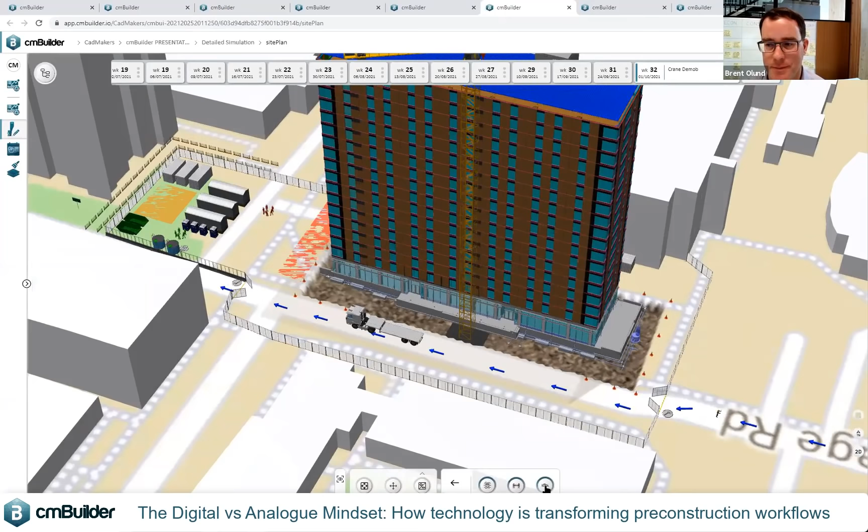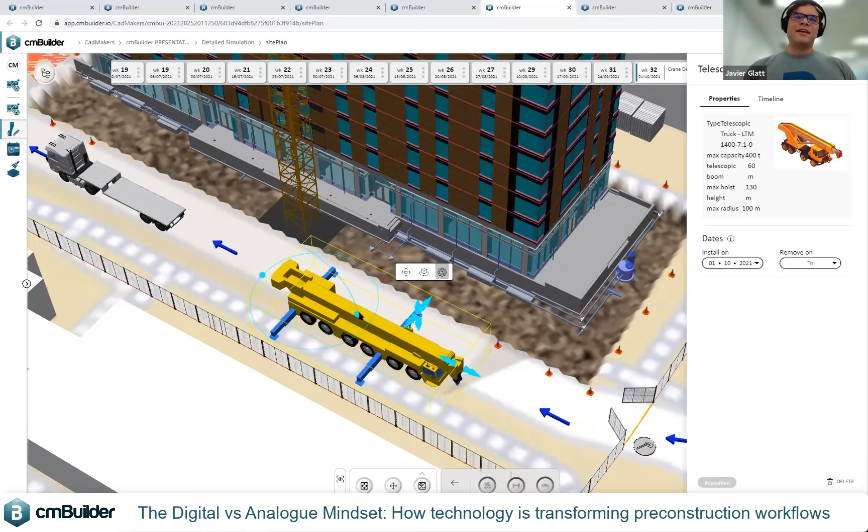Okay, I don't want to take you one more minute past the time. Brent, Tyler, Richard, thank you so much for doing this. This is amazing. That was a lot of value brought. I think some cool stuff about the future. We're fortunate that we get a chance to show you what impact we hope we will have in the future, because we want to bring high value, low cost tools to the construction industry so everyone can work in a more digital way, share links, not files, and use data and intelligence instead of anecdotal data or just knowledge inside our heads. So thank you very much for this.